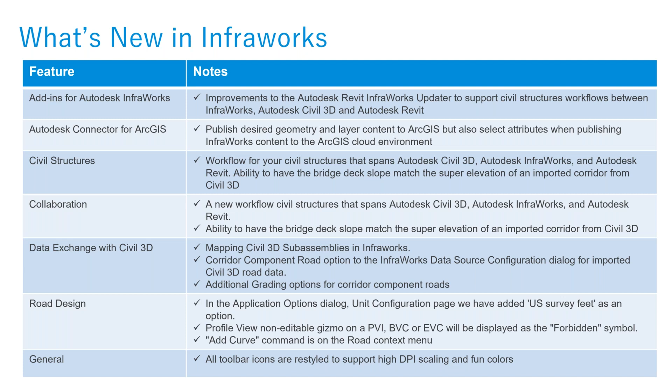First things first, InfraWorks connected workflows. So what can we look forward to in the connected workflows?

There are, as I said, corridor enhancements inside of Civil 3D. Assume you're a roadway design engineer designing a corridor. Once you've designed your corridor, there's a lot that goes into a Civil 3D corridor that needs to be depicted exactly as it is inside InfraWorks as well.

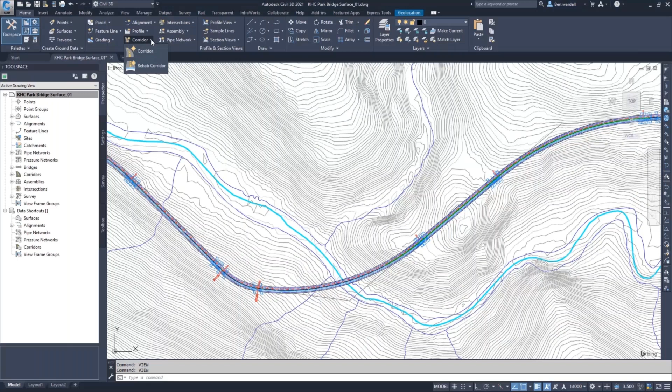Now, with the new capability, we suggest you go for import Civil 3D drawing. It gives you greater control. You'll be able to bring in specific features, not all the features.

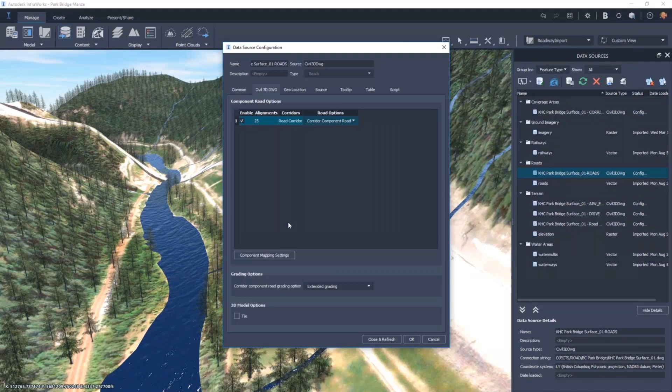So you can map the corridor component road, and have the mappings for various materials so that it's a real world view of what your design looks like inside Civil 3D.

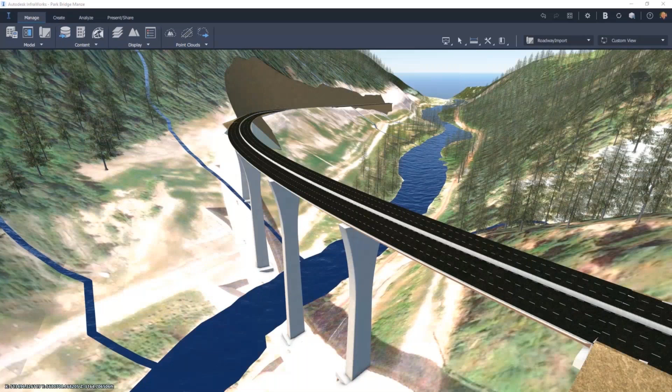More often than not, we see this complaint coming from civil engineers or design engineers, so that downstream functions like adding a bridge or tunnel can come automatically inside InfraWorks. Also assume there's a change in the way your geometry occurs - when you change any geometry inside Civil 3D, that should be seamless inside InfraWorks.

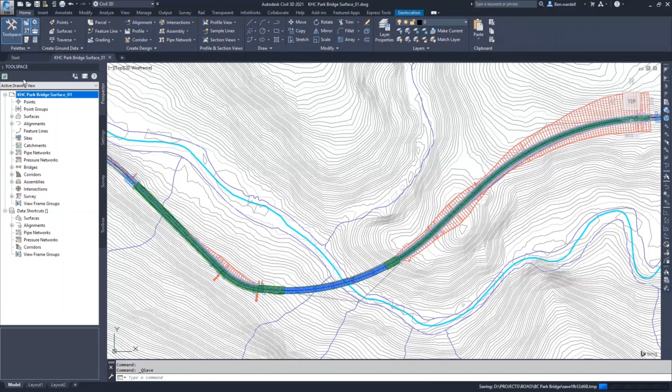So what it does is, going by the active link that is there inside InfraWorks, you can just re-import and have the geometry imported without any changes. The structural elements change accordingly without having to change a bit - so dynamically, the structural elements also change.

Apart from that, you can also view your cross sections on the go, which has always been a great feature inside InfraWorks. So this is one of the things.

Whom does it help? It helps design engineers, specifically road and rail engineers. What used to happen was I always came across road design engineers or rail design engineers who would say, I'm not getting the exact depiction of my Civil 3D corridor inside InfraWorks. Now that issue has been ironed out to a large extent - you can breathe easy. This will definitely assist design engineers going forward.

Secondly, InfraWorks - enhanced civil structures workflow. This has always been in the limelight over the last 2 years. The kind of enhancements that have been coming to the civil structures is mind-blowing.

What we used to earlier see is a very disconnected workflow, in which the bridge engineers were not really confident of bringing it into their day-to-day work style. So Autodesk has gone a step further in smoothing out the workflow for bridge design.

So what this does is, assuming you've designed a roadway project inside Civil 3D, you can bring it inside InfraWorks and be able to do all the downstream functions. Then, using the parametric capability of InfraWorks export, you can export the bridges to Excel spreadsheets and have them edited there.

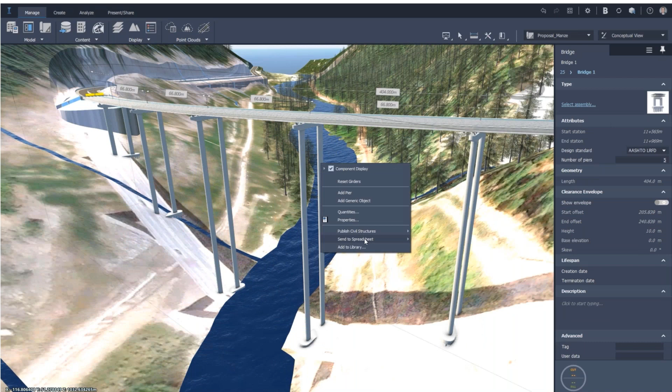Bridge engineers like it this way. It gives better control over the designs, what they believe. So we brought in spreadsheets for repetitive tasks.

You can fine-tune the designs this way, and also carry out a multitude of analysis, like line girder analysis within InfraWorks, which gives bridge engineers a great deal of confidence even before they move such models to other analytical software. Now you can change your designs on the go using a combination of InfraWorks and Inventor - the sky's the limit when it comes to optioneering.

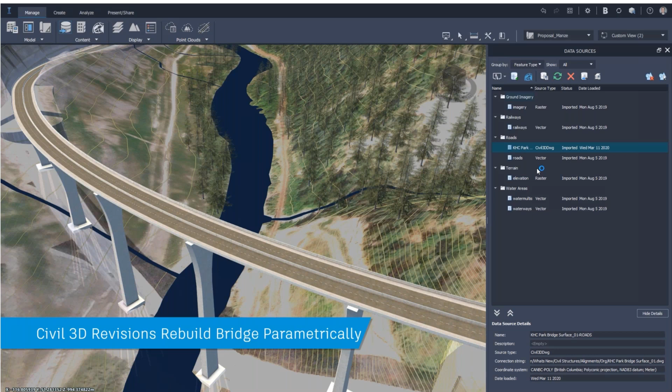So any changes coming in from the Civil 3D model structure align. There's also a great deal I'll probably show you in detail - the way we import information from InfraWorks to Revit has changed. I don't know how many of you have noticed, but there is a new workflow now in place to bring bridge models inside Revit.

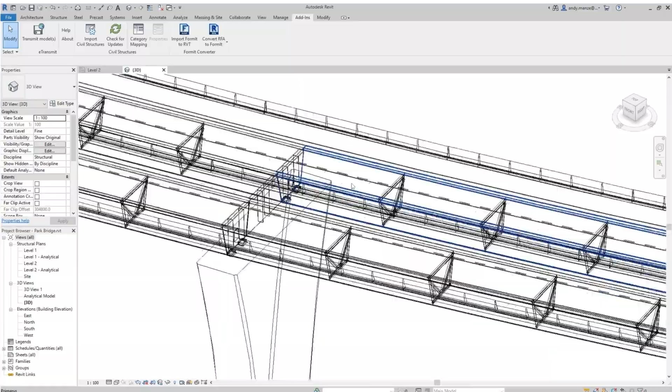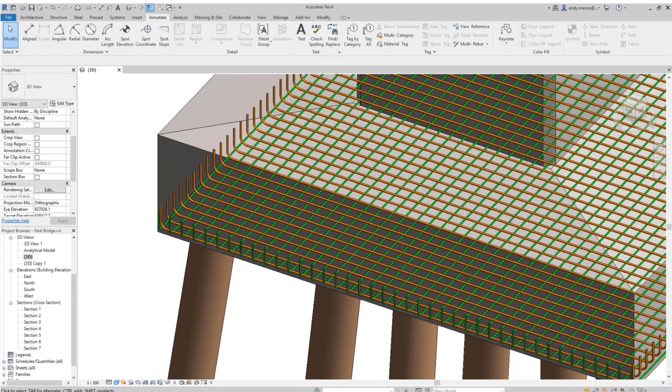So once you make the model changes inside of Revit or InfraWorks, a pop-up window occurs saying that you need to revise or update the model. Going forward, bridge engineers can also have a lot more detailing and documentation inside of Revit, which is known to have saved a lot of time and effort for the bridge engineers themselves.

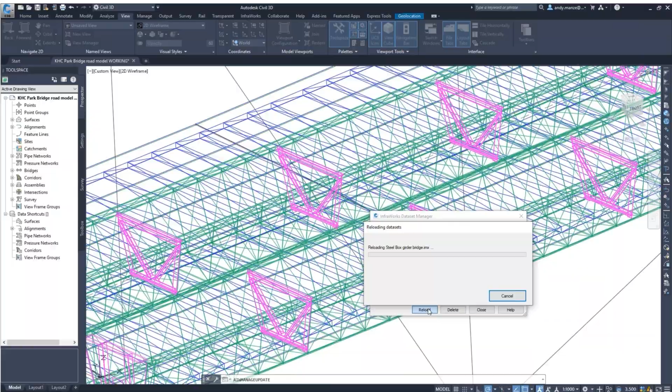Not only that, even for the design engineers for road and rail, the model comes up automatically and throws up a balloon window saying that the design has been updated, which can be included for documentation inside of Civil 3D as well. Now, going by this methodology, it connects bridge engineers and road engineers alike, and they can be on the same page when it comes to what they're designing and what is the actual latest design file to look forward to.

So whom does it benefit? Bridge engineers and road engineers alike. So we've seen a great deal of time savings specifically for the bridge engineers, because the kind of elements that you're bringing inside of Revit only helps you save time and effort, specifically on the documentation part or the quantification part. Now Revit also has the infrastructure category brought in that makes it much more flexible and has better control over the data you're bringing in from InfraWorks.

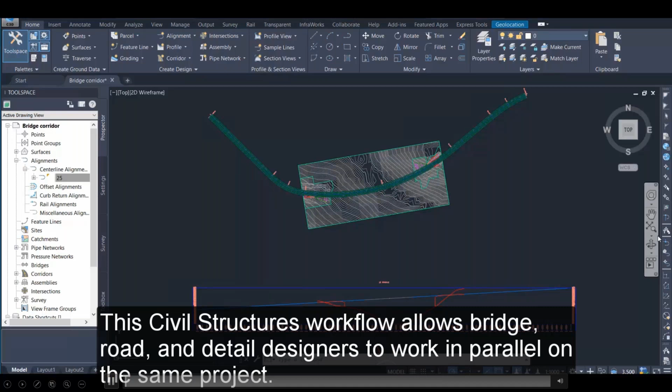So as I told you, there are 3 products that you can look forward to with major changes in 2021. One is Civil 3D, one is InfraWorks, then the third one is Revit, right? So inside of Revit, if you see, there is a new workflow that is coming into place here. What happens is, assume you're designing a bridge, right? To create a corridor, just save your drawing.

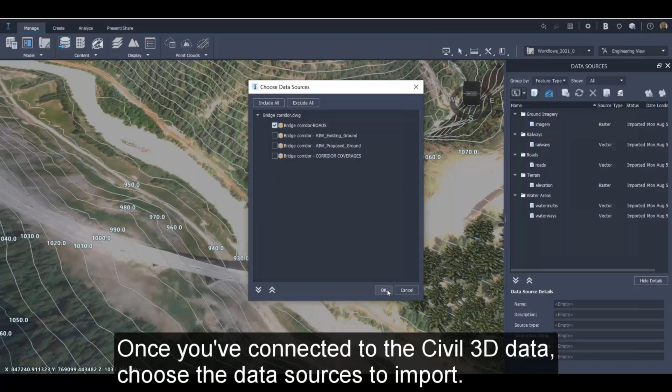The ideal way to bring it inside of InfraWorks, we normally tend to go with the IMX file. I would suggest in this case, with the new workflow coming into place, to have better control over the elements that you're importing, please use the AutoCAD Civil 3D option. Or IMX can also be used, but I would suggest personally to use Civil 3D drawing. Now, once you bring in the data sources, it gives better control of what elements you want to bring in inside of InfraWorks. So in this case, it's just bringing the road geometry. And you can review and configure the imported road models.

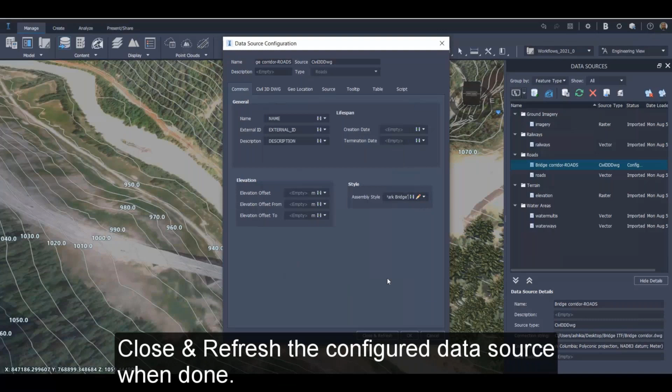If you go to the Civil 3D drawing, of course, first you have to select the coordinate system. And here you have the option of choosing between a component road or corridor component road. So the corridor component road option will bring in the design road from Civil 3D as it is. So you need to be wary of that. So you can use the common tab to specify an InfraWorks road assembly for the imported road model. So the design coming in from Civil 3D will be depicted exactly as it is. So that's half the problem solved.

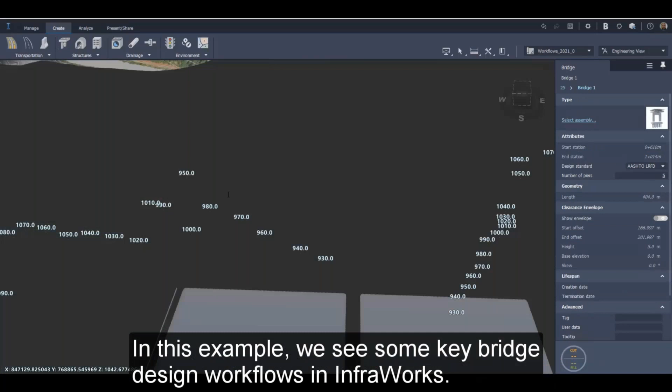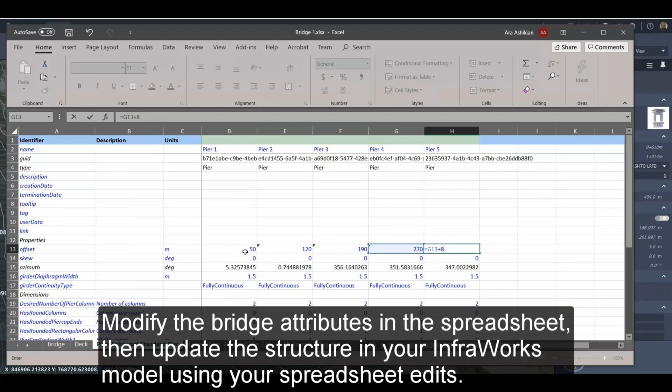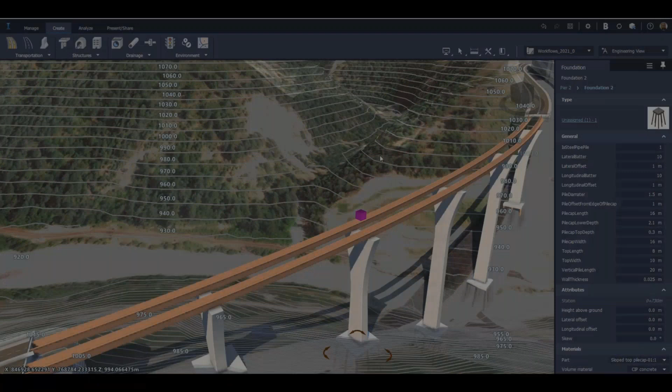So now again, you can go to your downstream functions, your bridge or your tunnel modeling. You can bring it inside of InfraWorks. I don't know how many engineers use the power of Inventor to bring in custom components for bridges. Please also consider the usage of Inventor for bringing custom components like piers, decks, girders, and so on into InfraWorks. What this gives you is greater flexibility in the way you design bridges. I know every civil structure is different, so you can bring in a whole multitude of design options inside of InfraWorks as well.

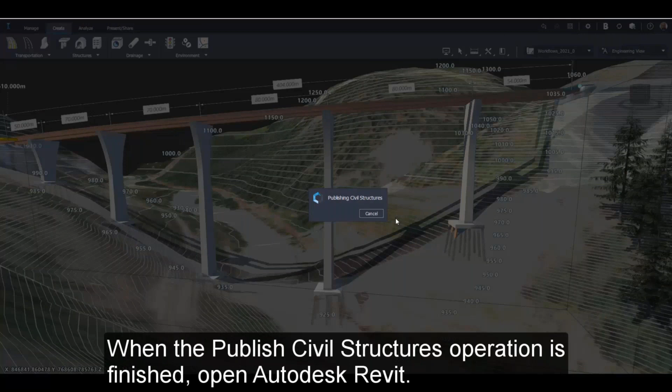So the way we export bridges has also changed. Now you see that you can't export it to Revit directly. You need to go to create new and create an IMX file. So this creates an IMX file for export. Earlier, it used to directly get into Revit as a Revit file. Now, there is a slight change in the way we import data inside of Revit.

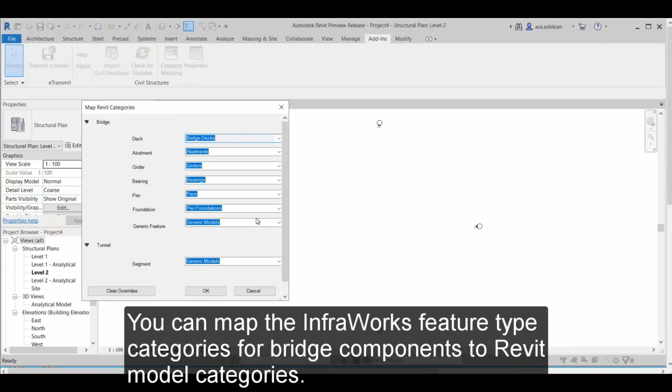Once you go, you select the metric structural template inside of Revit, and then there is a specific add-in for importing civil structures. Now, this has every element of your bridge, deck, abutment, girder, and there's a multitude of options for abutments as well. There are about 30 plus components that have been added inside of these Revit categories. That gives us greater flexibility and control over the kind of elements you're importing from InfraWorks.

Once you import the bridge IMX file, you can directly bring it in as a Revit model and have a whole lot of things developed on top of it: annotations, documentation, reinforcement detailing, right? So this workflow has proven to be very seamless. I would suggest this workflow over the previous workflows.

And with respect to annotation, with respect to design changes, with respect to quantities, this workflow has proven very valuable because, say, for example, I have to generate pier volume alone rather than the entire bridge. I can do that.

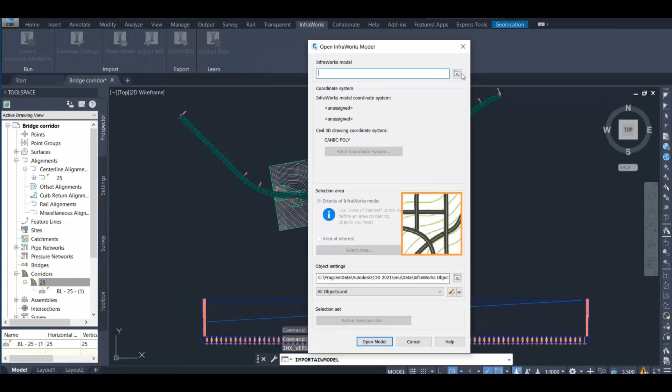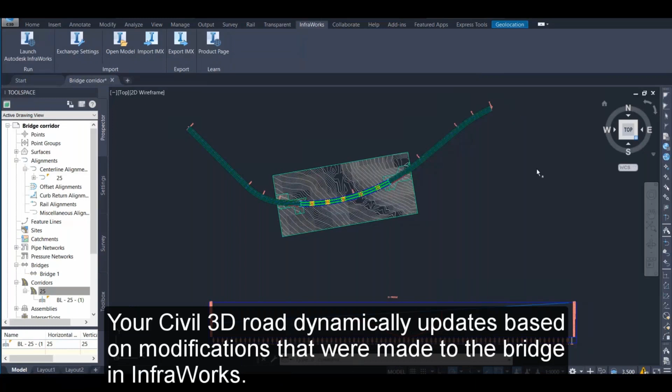Even inside of Civil 3D, you have the option of importing the IMX file as a bridge. So what happens is once you select this, there is now a separate bridges category inside your toolspace. If you've noticed, there is a new bridge category that has come inside of Civil 3D. So this gives you control specifically to the bridge itself. We don't need to worry about the entire corridor from InfraWorks that used to be coming in earlier.

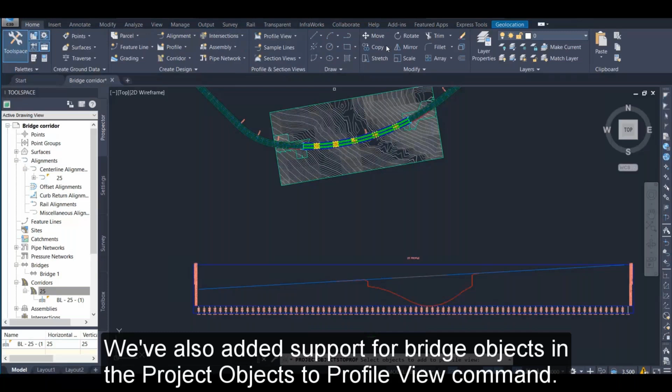If you remember the old timers, if you remember the way earlier the bridge module used to work, we used to just design the bridges between two corridor regions. Now this is the same kind of terminology that has come, and it gives us greater control over the visibility of various elements of the bridge as well. So bringing these bridges in the profile view for documentation purposes is very useful.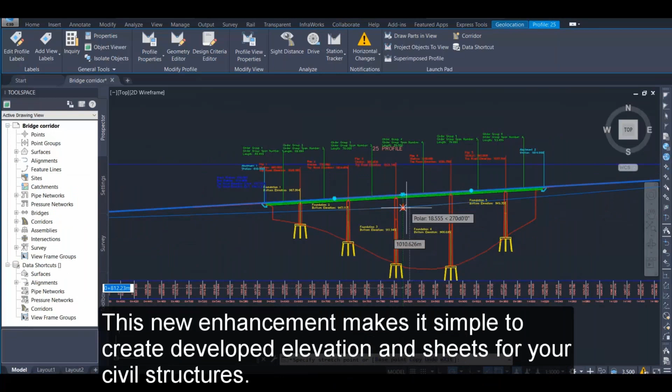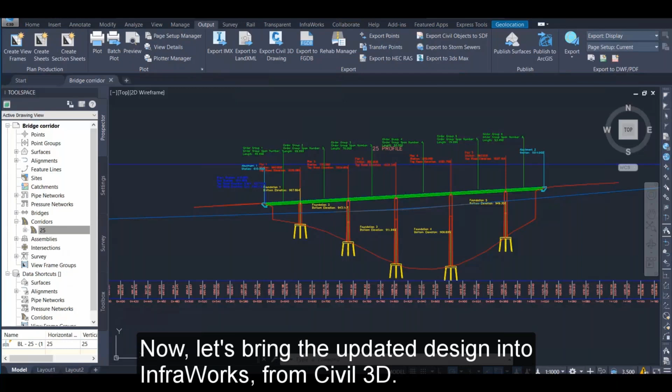So assume that you're changing your profile. What used to happen was you needed to bring it in. I mean, those changes would not be dynamic, right? So you only needed to export this alignment into InfraWorks and then refresh the model and bring the element back into Civil 3D. So this change, if you bring it inside of InfraWorks, it also brings in the geometrical changes that have occurred inside of Civil 3D, and at the same time it helps us update the IMX files for the structure.

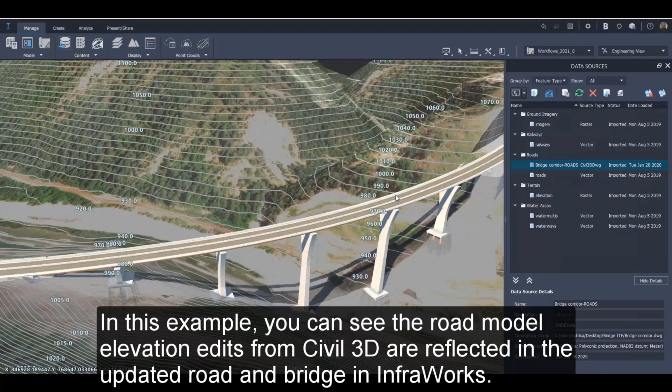So in this case, it's updating the vertical profile, right, as we changed. And now, consequently, there are some structural changes that have occurred to the bridge. So this needs to reflect inside of Civil 3D. So it's a matter of just going back to Civil 3D and there's a pop-up balloon that comes up that says changes have occurred in the InfraWorks model. Do you want to incorporate? So as simple as that. So if you refresh this, as you see, you can bring in all your Civil 3D corridors as they are.

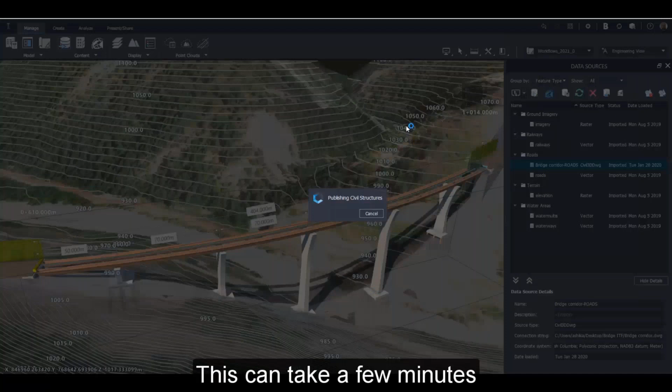And as I told you, these changes need to be updated inside Civil 3D. So how do we do it? So again, I will just go to publish civil structures and update existing. I just update existing and leave a note. The bridge engineer leaves a note to the road design team saying that there has been a change in the bridge. Please incorporate it inside of your Civil 3D documentation.

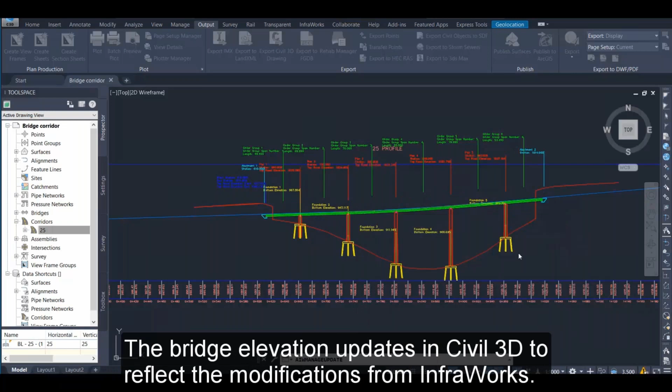Once you go back to Civil 3D, you get a balloon saying that there has been a change in the bridge IMX file. Do you want to incorporate it? And the notes also come up. So the road engineer knows what exactly has happened, what bridges have been changed. So he doesn't need to redo the entire profile. So right click and just say update, and then the whole design comes up.

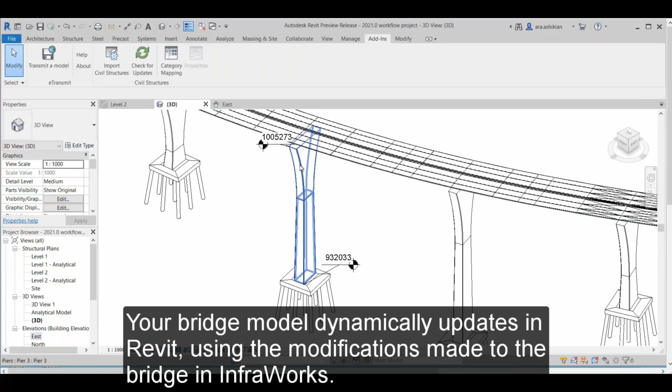The same occurs when you come into Revit as well. If there is a change in design in InfraWorks, you get a notification saying that there is a change from the InfraWorks model. Do you want to apply? Just say apply, and the entire changes are reflected. This translates into a great deal of time savings with respect to change management.

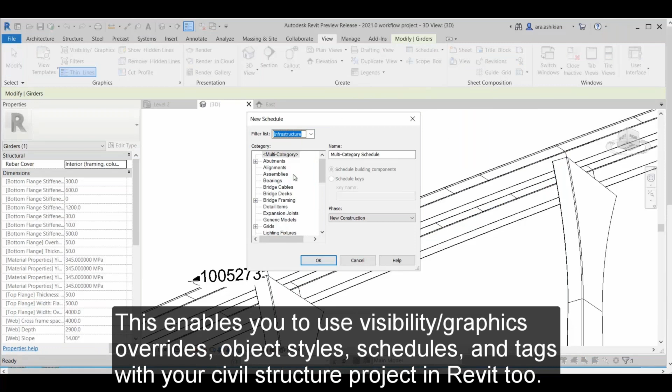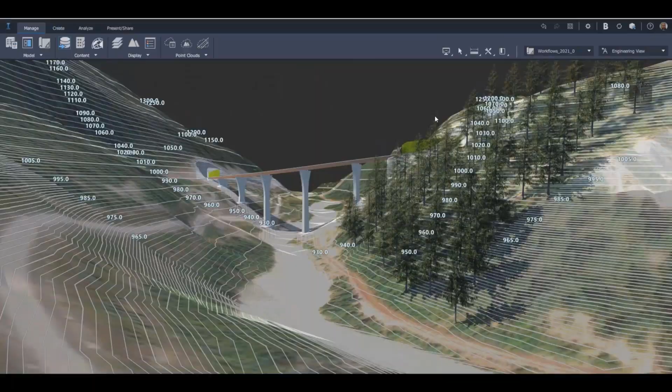So as I told you, there is now a new feature inside of Revit, which has categories for infrastructure specifically. So what this does is bring a great deal of flexibility in the way we bring about specifics like pier volumes, deck volumes. The look and feel of the individual elements can all be seen. So whom does it benefit? It benefits bridge and road engineers alike.

So just a little bit of detail as to how visually this changes inside of Revit. For those of you who have attended my previous webinars, I must have shown this. In fact, inside of Revit now, in model categories, there is a specific infrastructure module. So the infrastructure module will give you a lot of control over your InfraWorks model.

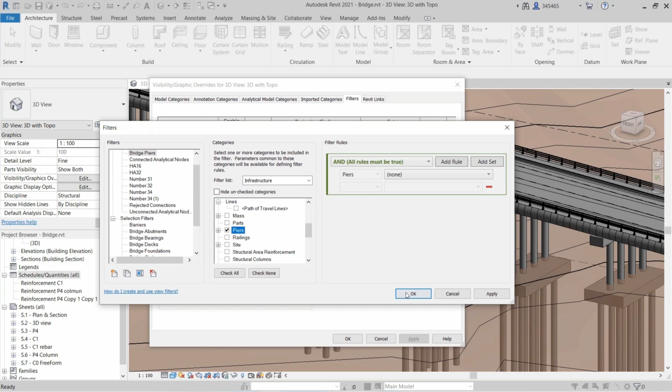Say in this case, I want to change the look and feel of my piers, maybe the shape or the color or the texture of my bridge. How will I be able to change any one specific element? So just go to any one particular element model category, and then apply the styles for that particular category. In this case, I'm changing the color of the piers. Now you can bring in InfraWorks models and be able to detail out inside of Revit as well.

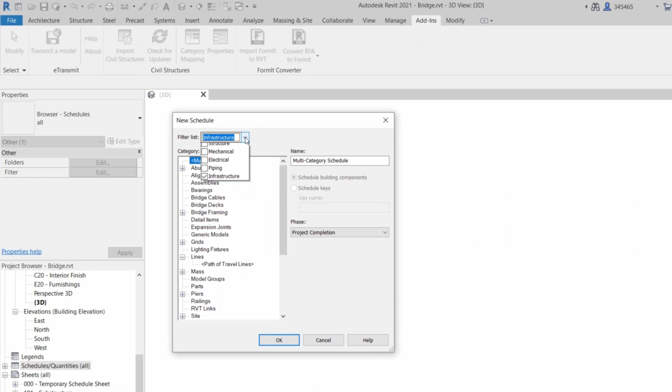Not only this, in terms of quantification as well, you can schedule the quantities for specific elements. Now, bridge engineers happen to like this part, having control over specifics. How much do the pier volumes come up to?

What is the measurement of the piers, and what station do they come at? So the volumetrics or the geometrics or annotation for that matter helps a great deal to the bridge engineers. So the Revit piece or the enhancement for model categories which has been included comes in as a boon to bridge engineers. So I would suggest all the bridge engineers on deck to fully utilize this functionality, start experimenting based on this.

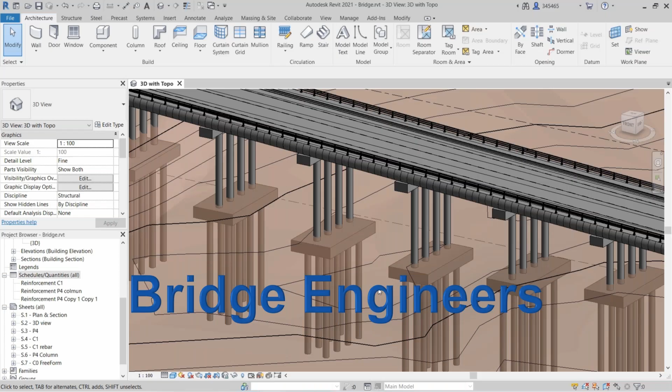So ideally, as I told you from my earlier presentation, if those of you have noticed, I've always professed this data exchange and collaboration between bridge engineers and design engineers like road and rail engineers. So there are two primary products in play here when you consider bridge design. So first is the road and rail engineer does the design alignment. He passes the drawing or IMX file to InfraWorks. As I told you, I would suggest DWG import.

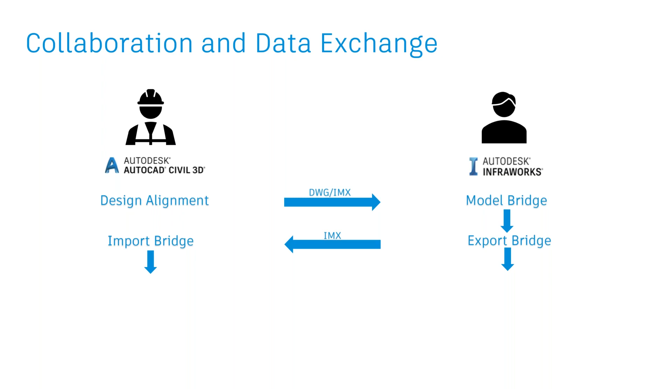The bridge engineer models the bridge and then exports the bridge back to the civil engineer. Now the civil engineer will bring it in the form of IMX, as I showed you, as just a bridge model. He imports the bridges, and from this point onwards, both start the parallel process of developing documentation and detailing. So the civil engineer projects the bridge in profile view for further documentation, in plan profile view, and the bridge engineer exports the bridge from InfraWorks to Revit. After this, both of them start generating their production drawings. Ideally, it has to be in tandem.

What used to happen was, earlier bridge engineers would wait for the inputs from the design engineers, and then wait it out. I saw that structural engineering workflows are the last to complete. There's a lot of pain points with respect to change management. So what we've done with respect to handling design changes is, once the road engineer or rail engineer changes the design alignment.

Sorry, I think I need to just turn on.

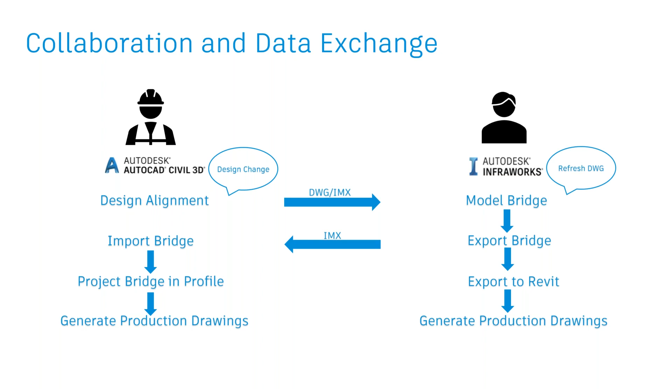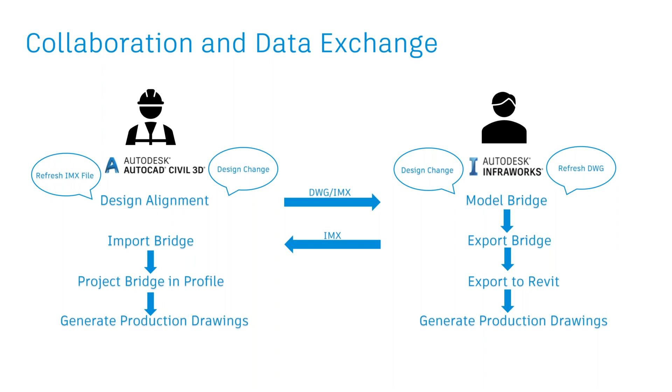Yeah. So once there is a change in design, it's as simple for the bridge engineer to refresh the drawing. Okay. And then if the change in InfraWorks occurs in the bridge, it's a matter of refreshing the IMX file. So it is a simple change. Either refresh the drawing when it comes to the bridge engineer, or refreshing the IMX file when it comes to the highway engineer. If they understand these two things, it becomes very easy.

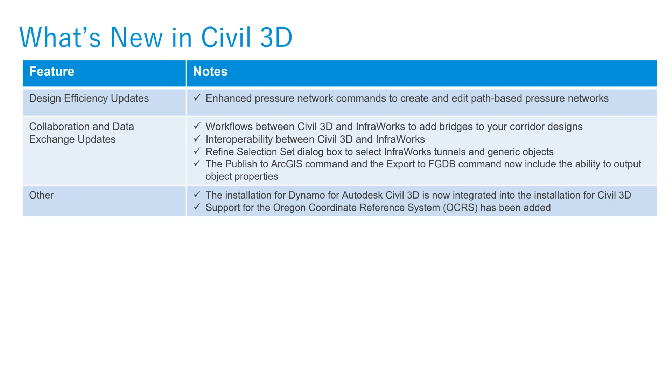So coming to the next big thing, which is what is new in Civil 3D. Well, it might not appear a lot. If I were to put it under feature enhancements, it would just say design efficiency updates, collaboration and data exchange updates, as you've seen inside of InfraWorks as well, and other. It may not sound like a large deal, but if I show you the next few set of things, it will bring in a great deal of work for you. So the first thing, as I already told you, it is bridge interoperability. So interoperability, it's a kind of a tongue twister.

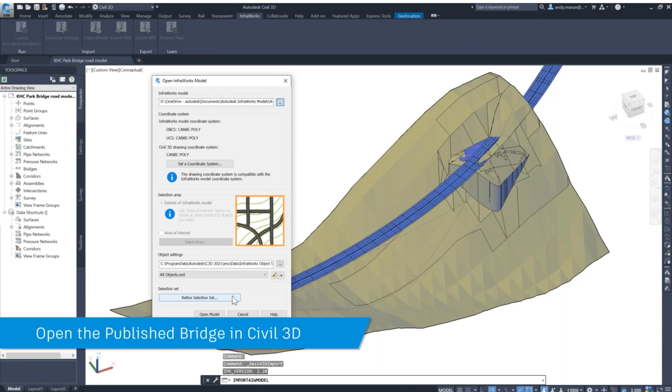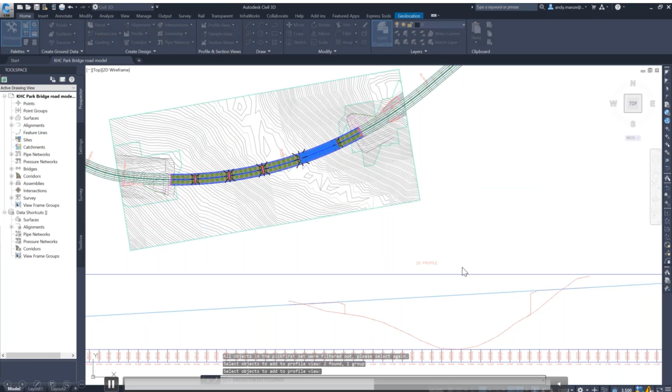So do not treat this as the same exact video, but we will look at it from a civil engineer standpoint. When you bring in an IMX file, you bring it as a specific element, as a bridge, right? So you have better control on that specific element. If you see on the left-hand side, in the tool space, there is bridges there, and there is a plus mark to indicate there is a bridge added inside of this model, or there are bridges inside of this model. So what helps the highway engineer is bringing in a great deal of documentation details.

So assume that there has been change in the design with respect to the InfraWorks bridge model. Even the structural changes that have occurred inside of Revit and InfraWorks can come automatically inside of Civil 3D. So that is a great deal. If you really want that level of detail. I've seen civil engineers wanting lesser details in terms of documentation. You can opt for that.

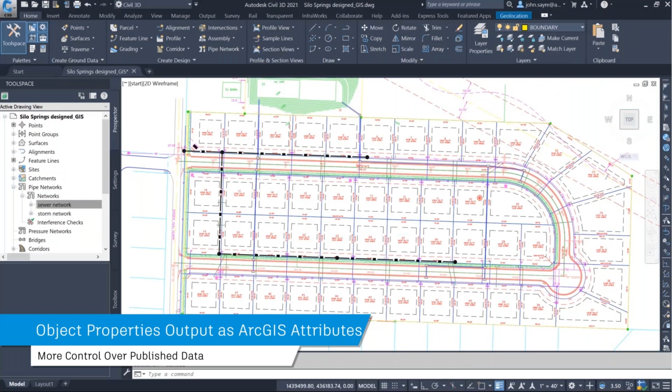So coming to the second part, which is ArcGIS connector enhancements. Now, I really do not know how many of you may have used this feature. This is a big deal for owners and operators. So assume you're designing a sanitary network here, and as an owner, you want it to be published onto a domain to be seen in public. So you publish it to arcgis.com as GIS elements.

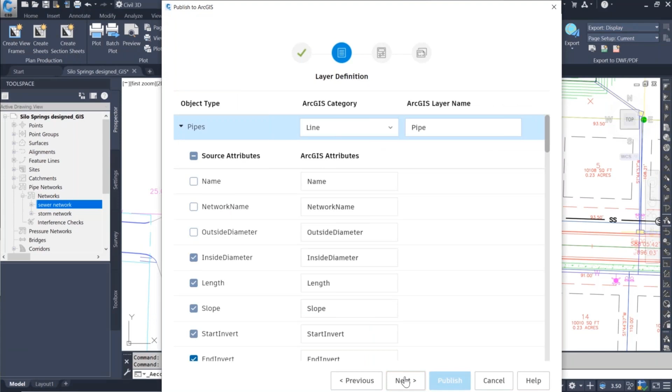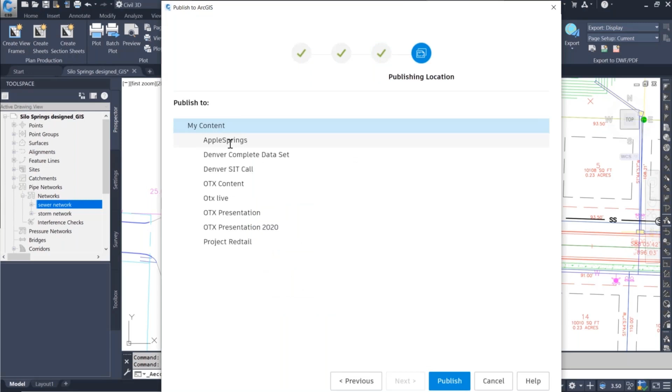Earlier, what used to happen was we wouldn't have all the controls on all the parameters that are coming in from the utility design or the pipe design. In this case, start elevation, end elevation, start invert, end invert are very key factors for owner operators to have a look at what level the utility lies. So this new feature will give you greater flexibility of what specific elements you can bring inside of ArcGIS and be able to stylize the view inside of ArcGIS.

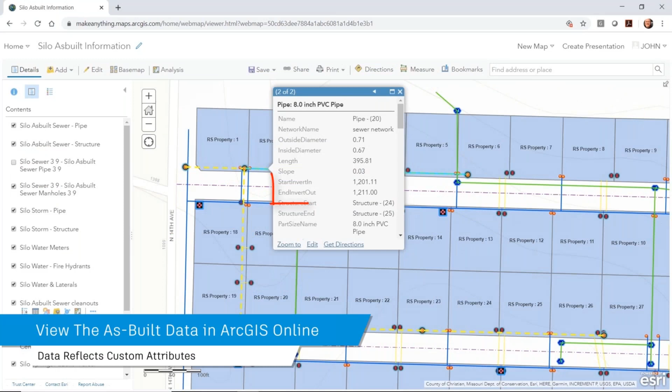I would strongly suggest for those who have not used the ArcGIS connector for Civil 3D or InfraWorks, use it. First of all, it is a fun thing to use. For engineers who don't have any idea about GIS, it is a fun thing to start off learning. It is used a great deal by planners and utility design engineers, but without a single command knowledge about GIS, you can now know how to convert your BIM objects, that is your pipe networks, into GIS objects. That is another big thing that is happening in the industry today. More and more owners and operators are asking for BIM and GIS integration. So this needs to be utilized to the fullest extent.

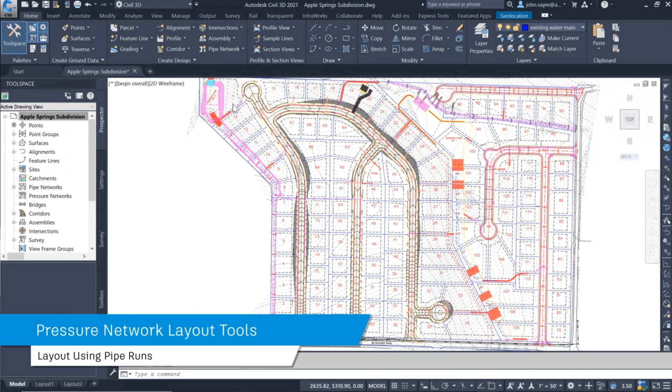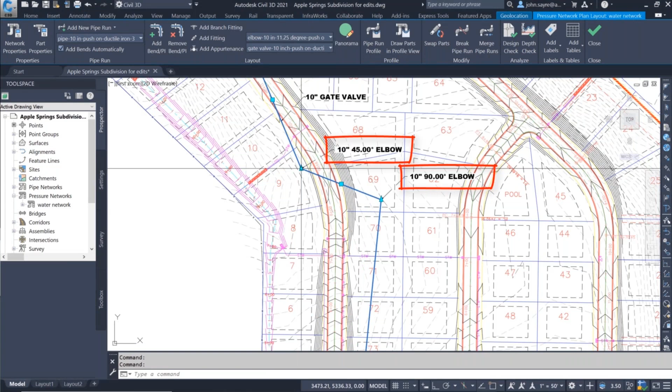So as I told you, in Civil 3D, it may not have been looked at as a great deal in terms of enhancements, but I would say it is a fantastic thing when it comes to pressure pipe enhancements. Let us go through some of them. Coming to pressure pipe networks, now we have the option of having layout runs in water pressure pipe network. Say, for example, there's a water pipe network, there's a main line, an ancillary line, a sub-ancillary line. Things like this can be controlled better. Now, once you change the alignment of the pipe network itself, pressure pipe networks automatically update the elbow joints as well.

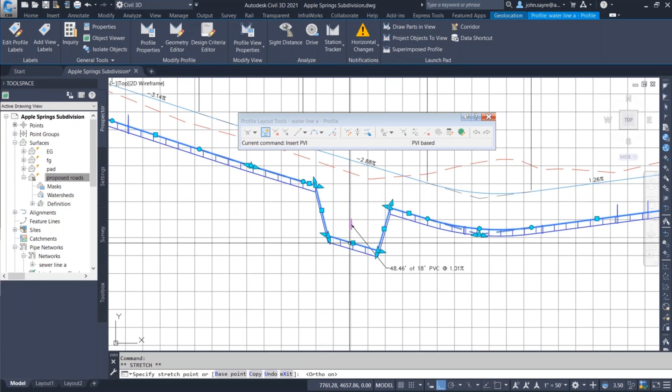There's another enhancement, which is a great thing inside of Civil 3D. You can underlay a pressure pipe network with respect to any surface. In this case, the blue line that you see on top is the design surface. If there is any change to the design surface, the corresponding levels for pressure pipe networks also change. And there's one more thing that has changed greatly: creating pipe lowerings. Now, if there was any other pipe crossing at that particular location, we used to do a 3-4 step process. Now it is just one click away.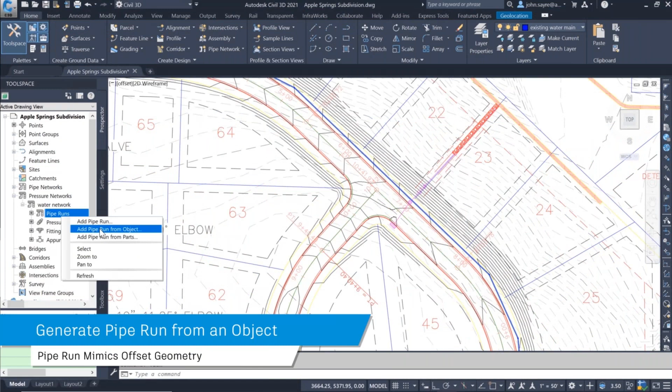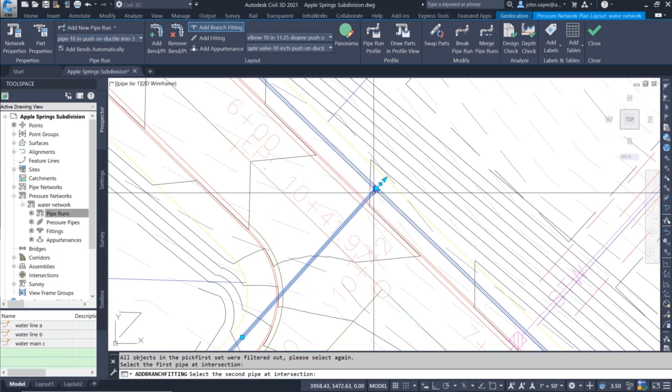Apart from that, you have the automation of being able to add joints or appurtenances automatically inside of pipe network or pressure pipe. Here you will be able to create pipe networks from objects. In this case, center line of the road, you'll give an offset to the center line of the road and be able to update the designs with respect to the pipe joints. And last but not least in terms of pressure pipes is the ability to bend the pressure pipes at a particular allowable angle. Even now the manufacturers are looking at pipe bends rather than a multitude of joints or elbows. So you can utilize this.

So that is great news for utility engineers, because these things that you've seen inside of Civil 3D 2021 create a lot of automation with respect to design when it comes to automation of elbow joints, automation of profile views, sticking to a specific design profile. All this can help utility engineers a great deal.

So coming to Civil 3D Dynamo nodes. Again, I wanted to find out whether all of you are utilizing Dynamo for Civil 3D. If not, I also have an upcoming webinar on Dynamo for Civil 3D, which all of you can join. Dynamo for Civil 3D is being touted as the next big thing for BIM modelers and civil engineers alike, because the kind of time savings or flexibility that Dynamo gives to Civil 3D is phenomenal.

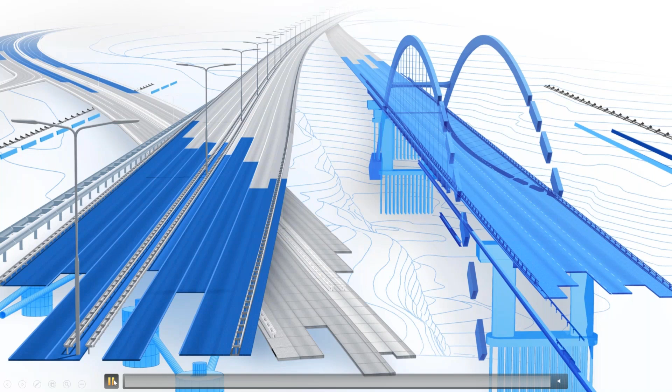Dynamo, for those of you who do not know, is a visual programming tool which helps automate certain tasks inside of Civil 3D. If I were to give you an example, placing light poles all along a road, or placing retaining walls all along a road, things like that, or automating labels. All this was there earlier, but in bits and pieces. Going forward in Civil 3D 2021, we see that new Dynamo nodes have been added to Civil 3D to further enhance the design automation aspect.

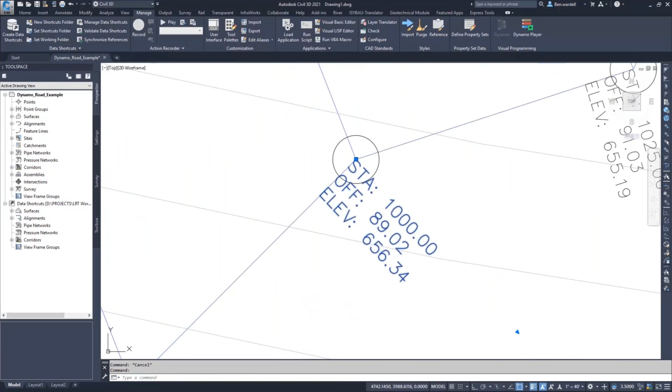So you can create multi-line text labels at one click of a button, which used to take us a lot of effort before. Not only that, now you have additions for including COGO points at specific BIM object locations. Not only this, you'll be able to add property set data to objects inside of Civil 3D.

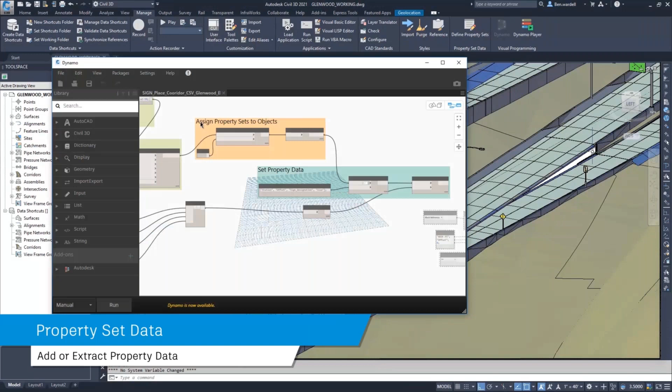This has got a great value in terms of asset management. Owners and operators look forward to this because they know what objects are lying there and what are the property sets that are assigned to that particular object or element.

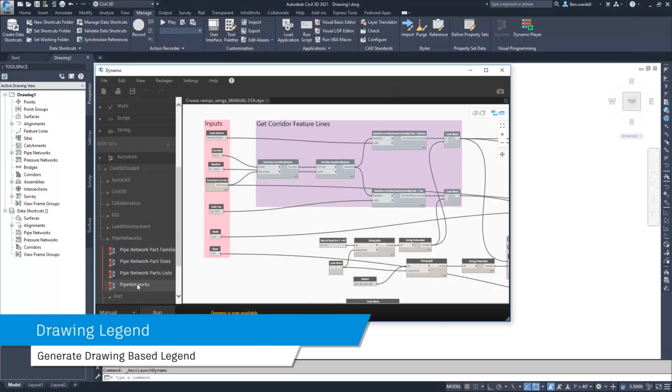And with the Civil 3D toolkit, what you will be able to do is also bring in a whole lot of design automation in terms of labeling or annotation. So in this case, if I want to label all the Civil 3D objects and bring a legend to it, you can bring it in. And for those of you who are already using Civil 3D pipe networks, you know that to change any part, you need to right click on it and go to swap part. This can be automated inside of Dynamo for Civil 3D.

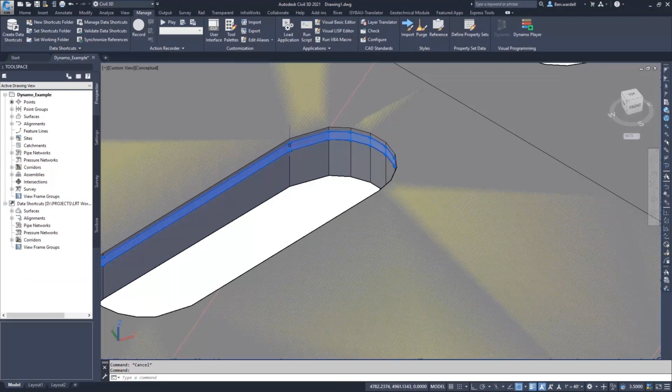Not only that, complex shapes and structures like this, in this case a parking lot or a building pad that you see here, you can have surfaces generated and volumes generated out of this in no time inside of Dynamo for Civil 3D. Of course, there are some things that even I need to experiment with, specifically the last part that I showed you. If you're keen on visual programming, I would suggest utilizing this Dynamo interface as well.

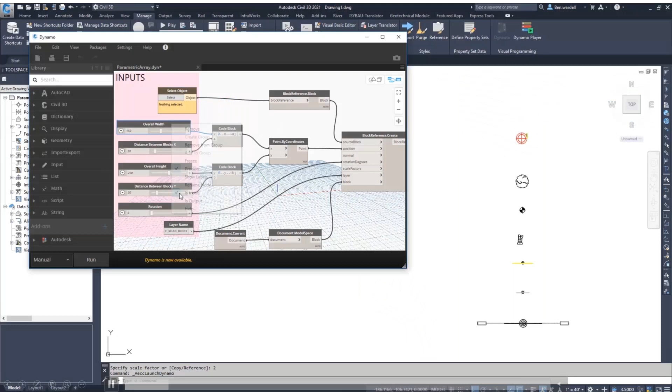Lastly, the Dynamo Player. So the Dynamo Player gives you the flexibility to automate some of the tasks inside of Civil 3D. Now, if you want to array a particular block inside of Civil 3D, it's just a matter of selecting it, selecting the spacing, overall width and size and scale, and then the rotation, and it occurs.

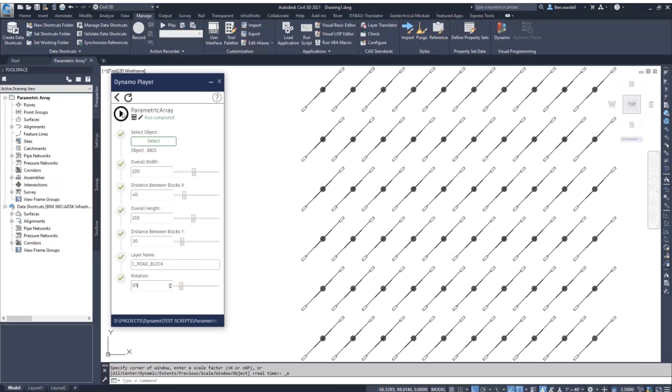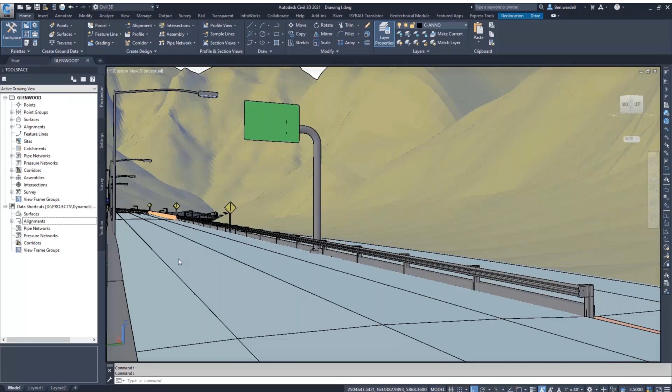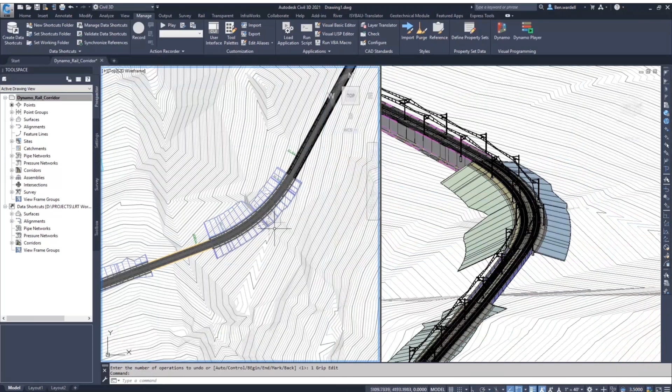Using Dynamo Player, let me pause this a bit. If you see this, once you create certain objects along a Civil 3D corridor, and then you change the alignment for the corridor to update, the objects that have been created using Dynamo will still remain, but it works on a kind of remembrance of the alignment. The alignment has been changed.

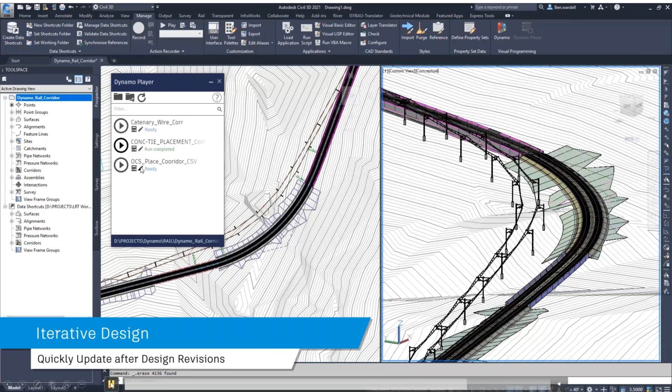It's just a matter of getting the alignment refreshed inside of Dynamo Player to change the objects which have been aligned alongside of it in Dynamo as well. So it has this remembrance theme wherein it knows what alignment it is linking to. And then once you play it, you have different elements that you're working with, and then you can bring about the changes.

So whom does it help? All disciplines. It helps bridge engineers, structural engineers, utility engineers, and road and rail engineers alike. So if there are any BIM modelers on this call, if you are keen on visual programming, I would strongly suggest moving to Dynamo for Civil 3D, because as projects increase, we are only able to automate things. And there are certain things like change management, which is a great deal in the industry today.

I see structural engineers struggling to bring about changes because all of the processes are 2D and disconnected. So they face a great deal of pressure when it comes to deliverables. So I would suggest bringing in the power of Dynamo to automate certain tasks and help you save precious time. Just imagine if all these tasks I've shown today were done manually, it would cost them a great deal. So I think from the new feature standpoint, that's it from my side.